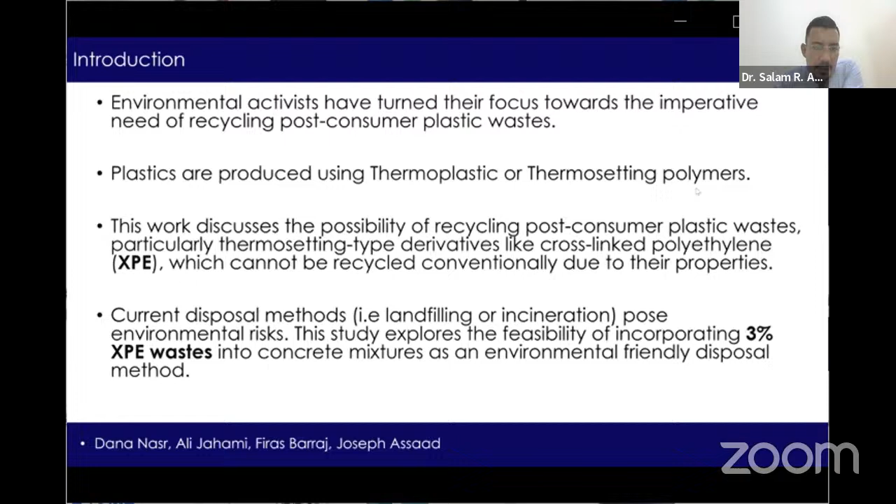Previous research studies showed that adding XPE to concrete can weaken the concrete's mechanical properties due to their relatively reduced density, weak characteristic strength when compared to natural aggregates, and poor adhesion bond with the cement paste. Three main alternatives are assessed in this work to restore the concrete mechanical and structural properties after the incorporation of 3% XPE plastic waste: one, reducing the water-to-cement ratio from 0.55 to 0.46; two, the addition of 1% steel fiber; and three, an addition of 15% styrene butadiene rubber (SBR) latex as a mixing water replacement.

Reinforced concrete beams without stirrups are tested for shear strength to study the possibility of using XPE in concrete construction, which represents an efficient disposal method of XPE plastic waste without harming the land and marine environment.

Let's talk now about the experimental program. Mainly, let's start with the materials.

ASTM C150 Type 1 Portland cement is used as a primary binding material along with natural siliceous sand and crushed limestone coarse aggregates, a high-range water reducer (HRWR) based on naphthalene sulfonate to improve workability, steel microfilament fibers having 13mm length and 0.18mm diameter, a commercially available SBR commonly used as a bonding agent, and XPE material obtained by shredding high-voltage electric cable plastic waste into pieces measuring 2 to 12 millimeters in size, as shown in the picture in this slide.

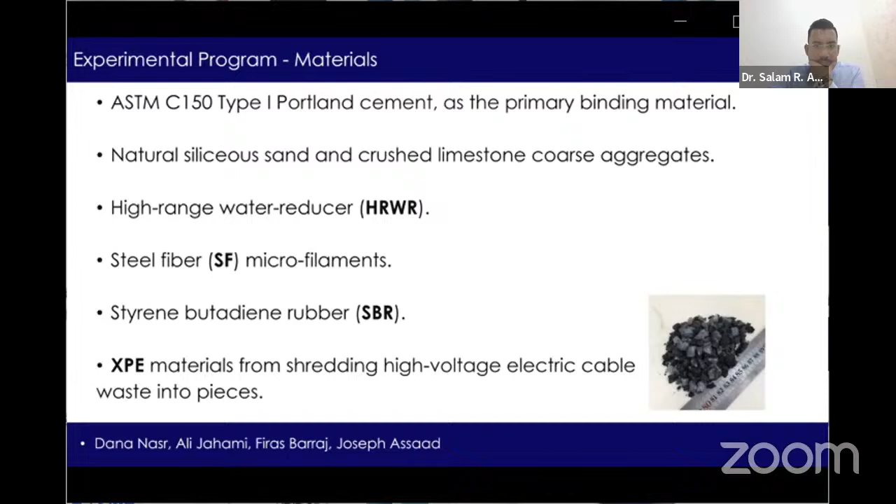Moving now to the mix proportions, 5 concrete mixtures are tested in this work. The first is the control mix with no XPE, containing 325 kg per cubic meter of cement, a water-to-cement ratio of 0.55, and a fine-to-total aggregate ratio of 0.45.

The second mix incorporates XPE shreds at 3% by total concrete volume, with fine and coarse aggregates adjusted accordingly to maintain a fixed aggregate ratio of 0.45. The third mix uses 3% XPE plastic waste with reduced water-to-cement ratio from 0.55 to 0.46.

The fourth mix contains 3% XPE and 1% steel fiber by volume. The final mix consists of 3% XPE and 15% SBR as a mixing water replacement.

Let's talk now about the testing methods. Our purpose was to determine the hardened density, compressive strength, splitting tensile strength, modulus of elasticity, flexural strength, and shear strength.

The molds used for testing reinforced concrete shear strength have the following measures: 150 by 150 millimeter square cross-section and 780 millimeter length.

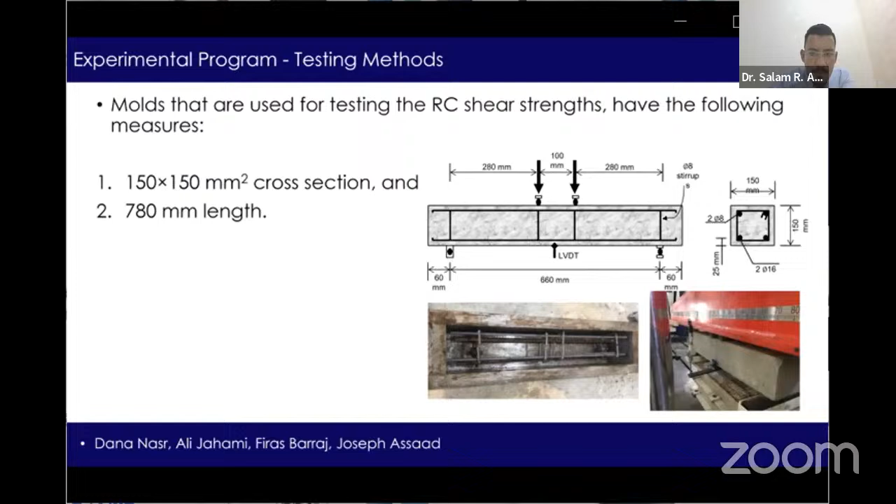Let's talk now about the test results and discussions, starting with plain concrete properties. The HRWR demand used to achieve a fixed slump of 200 plus or minus 15 millimeters, the hardened density, and mechanical properties like F'c, Ft, Fr, and modulus of elasticity of tested mixtures are summarized in the shown table.

It is clear that the HRWR dosage slightly decreased from 2.65% for the control mix to 2.5% with XPE addition, and this value remarkably increased to 3.7% when the water-to-cement ratio was reduced from 0.55 to 0.46. This can be related to reduced mixing water and increased internal friction within the aggregate skeleton.

The density of the hardened concrete decreased from 2,315 kg per cubic meter for the control mix to 2,225 kg per cubic meter with 3% XPE addition. The drop in mechanical properties due to XPE additions is very clear in this table, but this drop was recovered when the water-to-cement ratio was reduced from 0.55 to 0.46.

For example, if we look at mix 3 containing 3% XPE and reduced water-to-cement ratio to 0.46, we notice that F'c reached 30.8 megapascal and Fr reached 5.6 megapascal. So we can conclude that reducing water-to-cement ratio is an appropriate alternative to refine the matrix porosity and ensure strength development.

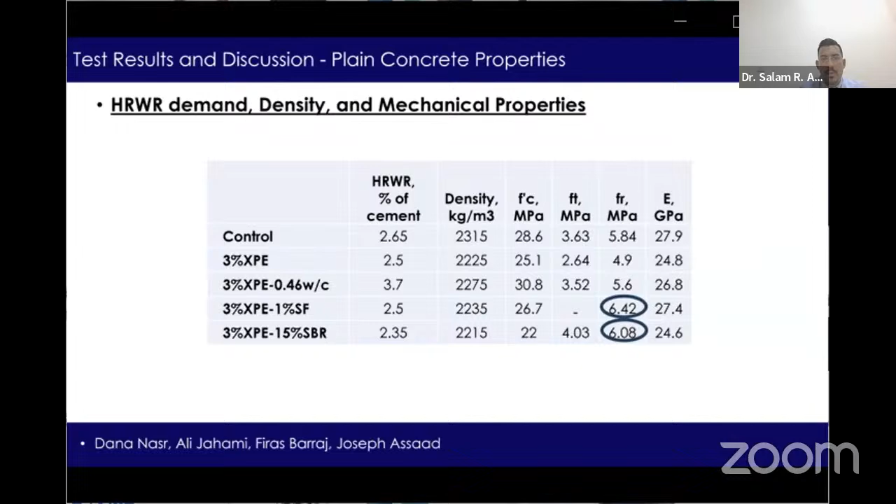Alternatively, when steel fiber and SBR were incorporated, only the tensile-related properties were recovered. For example, Fr reached 6.42 megapascal when 1% steel fiber was added, and Fr reached 6.08 megapascal when 15% SBR was used. For fibers, this can be due to a bridging effect that delays crack formation and propagation during tensile loading, leading to improved flexural properties. For SBR, these polymeric latices are efficient in improving adhesive bonding within the aggregate skeleton.

It is very clear that the mechanical properties dropped with XPE additions due to their weak strength and lightweight characteristics compared to natural aggregates. This drop in mechanical properties due to XPE additions was recovered, as previously seen, when the water-to-cement ratio dropped from 0.55 to 0.46. And for the last two mixes, as previously mentioned, the values of Fr were recovered with the incorporation of steel fiber and SBR.

Let's move now to the shear strength of reinforced concrete beams. As shown in the figure presented in this slide, all reinforced concrete beams displayed similar load versus midspan deflection curves.

We can see that the control beam failed at a Pmax, or ultimate load, of 57.94 kilonewton and a deflection delta max of 2.77 millimeter, as shown in the table on the next slide.

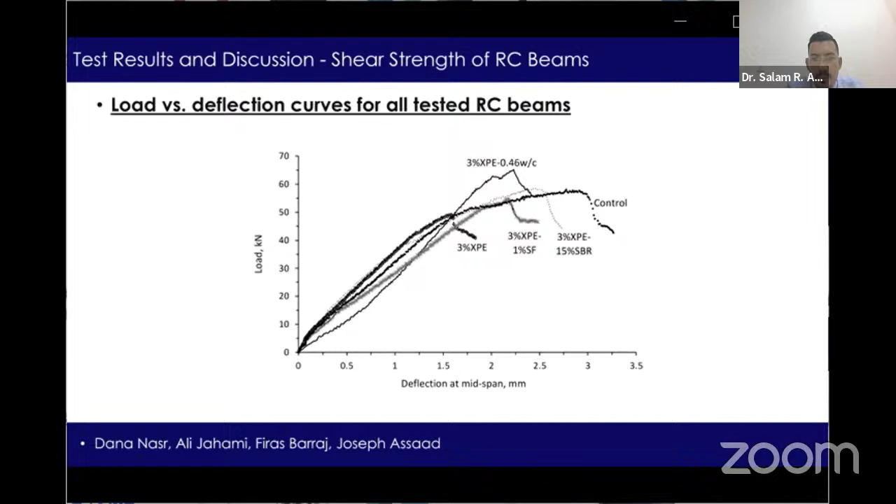In addition to Pmax, representing the maximum load capacity, and delta max, representing the corresponding maximum deflection, the table summarizes values for V crack, which represents the first diagonal cracking load, and PDC, the post-diagonal cracking index, used to quantify the maximum beam resistance after the formation of the first diagonal crack.

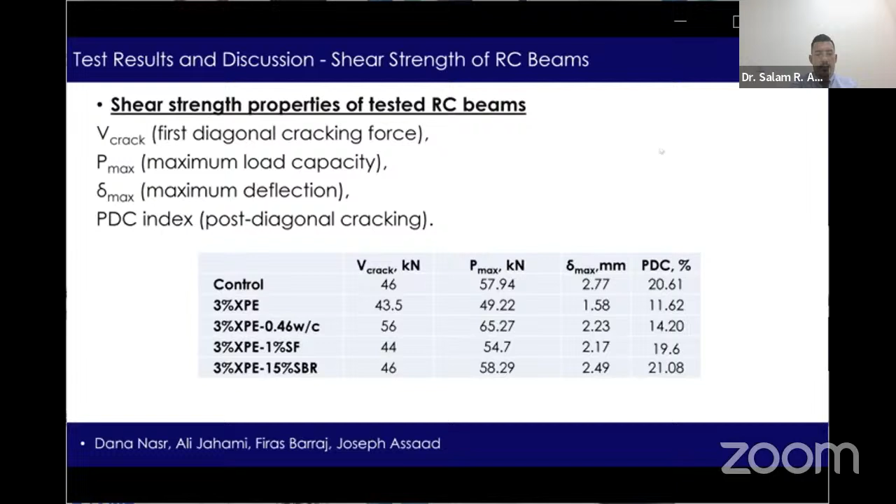So let's discuss these results together.

From the previous figure representing the load versus midspan deflection plot, we can conclude that the performance of reinforced concrete beams with the addition of 3% XPE was fully restored, or even surpassed the performance of the control beam, when the water to cement ratio was reduced from 0.55 to 0.46.

The corresponding values for the mix including 3% XPE and 0.46 water to cement ratio are: 56 kilonewton for V crack, 65.27 kilonewton for Pmax, and 2.23 millimeter for delta max.

Thus, the disposal of 3% XPE plastic waste in concrete production can be achieved without negative effects on the structural properties, given that the mixing water is adjusted to restore the concrete strength.

Alternatively, the steel fiber or SBR alternatives also proved efficient to restore the reinforced concrete beam's performance, but these remain slightly less performant than the water to cement ratio reduction alternative.

For example, when 1% steel fiber was used in the concrete mix, the shear strength properties reached: V crack 44 kilonewton, Pmax 54.7 kilonewton, delta max 2.17 millimeters, and PDC index 19.6%.

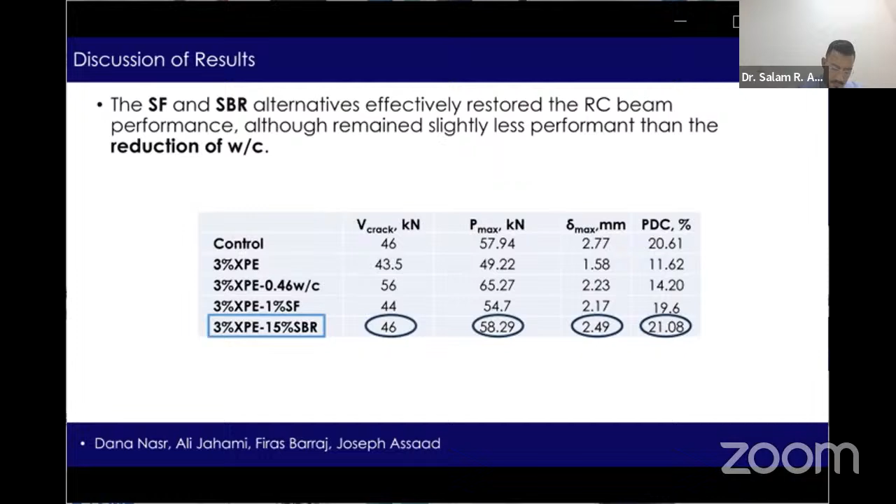For concrete containing steel fibers, the improvement in performance can be due to the bridging effect that reduces the initiation of cracks during loading and promotes higher aggregate interlock along the cracks.

Alternatively, for concrete containing SBR, the improved performance can be due to the presence of polymers that enhance bonding along the XPE particles and cement matrix surfaces. Additionally, the use of SBR improved the bond to embedded steel bars, densifying the interfaces along the longitudinal reinforcement.

Finally, it was shown that the post-diagonal cracking index remarkably increased. It became pretty close to the control mix when steel fiber was used, and it even surpassed the value of PDC corresponding to the control mix when SBR was used in the mix.

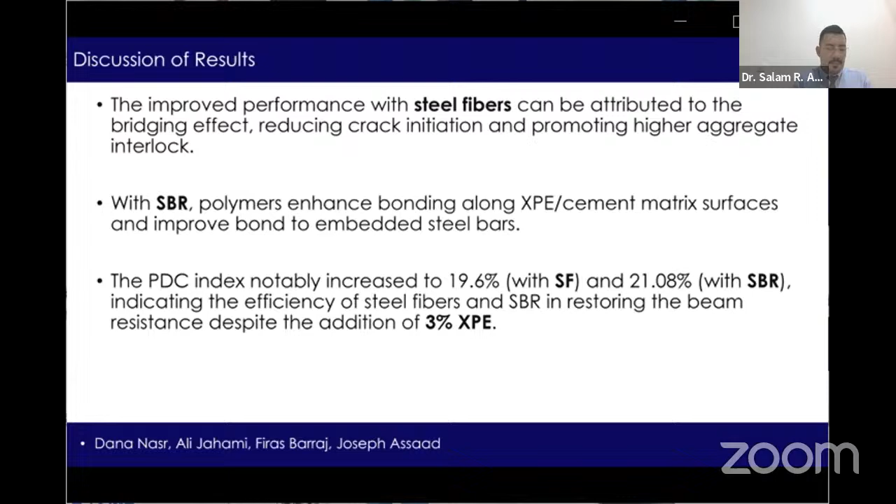So we can say that these results indicate the efficiency of steel fibers and SBR in restoring the beam resistance after the formation of the first diagonal crack, despite the addition of 3% XPE plastic waste.

Let's conclude this presentation with the following concluding remarks. This study is part of a comprehensive research work undertaken to assess the feasibility of incorporating XPE plastic waste in concrete mixtures as an environmentally friendly way of plastic waste disposal.

The primary objective of this study is to explore different alternatives to restore the concrete mechanical and structural properties after the incorporation of XPE additives. Test results showed that the addition of 3% XPE by volume to the concrete mixture caused a drop in compression and tensile responses due to their weak strength and lightweight characteristics compared to natural aggregates.

One main alternative proposed in this work is the reduction of the water to cement ratio from 0.55 to 0.46, while adjusting the workability with additional superplasticizers. This alternative was found efficient to refine the matrix porosity and enhance the plain and structural properties of concrete containing XPE plastic wastes.

Other two alternatives were also proposed in the study, based on incorporating steel fibers and SBR respectively. The tensile-related properties were recovered with the addition of steel fiber and SBR due to improved bridging and bonding that can delay the formation and propagation of cracks. The shear strength of reinforced concrete beams containing XPE waste improved with the addition of steel fiber and SBR due to the enhanced aggregate interlock mechanism along the diagonal fractured surfaces.

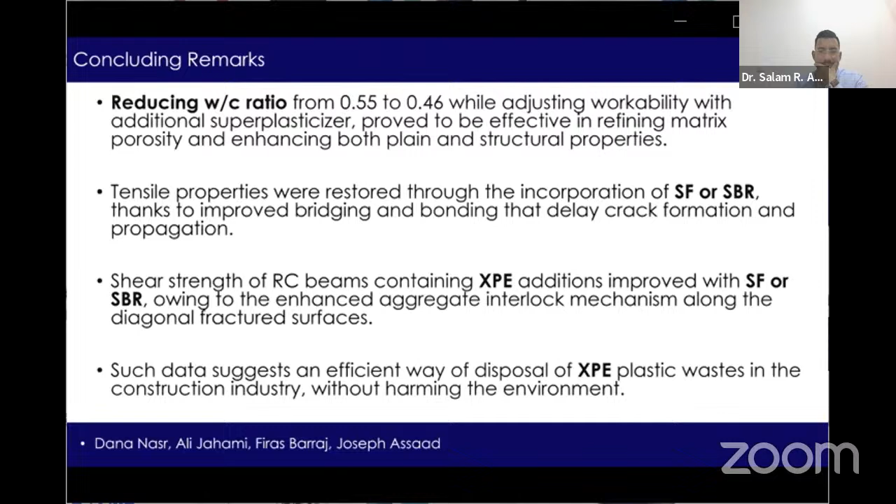As a final conclusion remark, we can state that such data suggest an efficient way of disposal of XPE plastic waste in the construction industry without harming the land and the marine environment. Thank you.

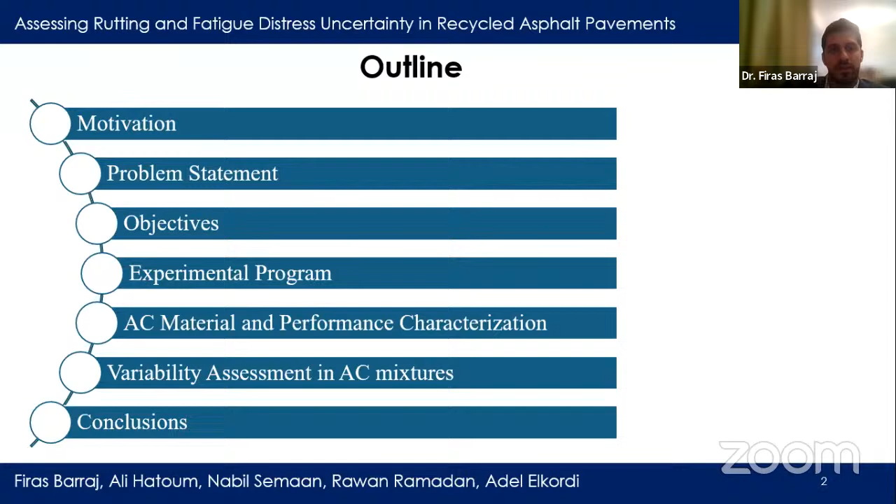Here are the main highlights of the presentation. I will talk about the motivation behind this work, the problem statement, the objective targeted, the experimental program to characterize asphalt concrete material and field performance, the methodology used to assess the variability in asphalt mixes performance, ending with some concluding remarks.

Starting with the motivation: while the cost of raw material is always increasing and strict environmental regulations are imposed, pursuing sustainable development in the asphalt industry has become a necessity. One effective way to achieve this right now is by using reclaimed asphalt pavement, RAP material, promoting recyclability to produce new asphalt mixtures.

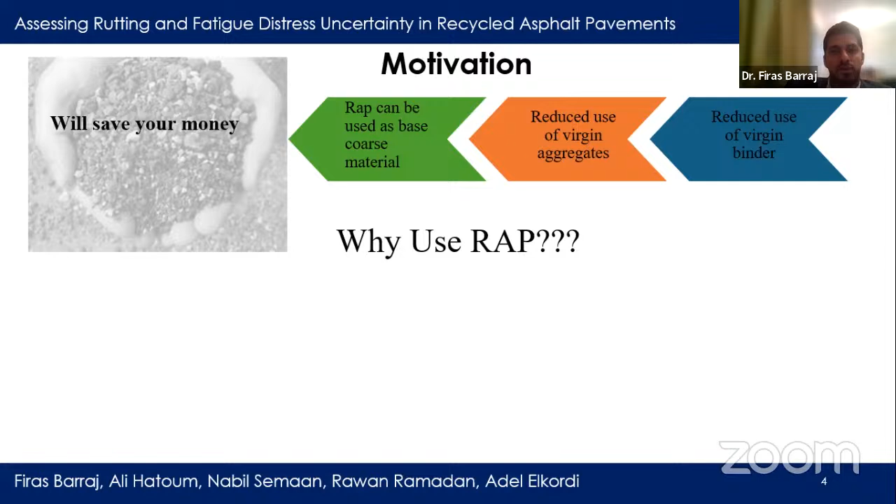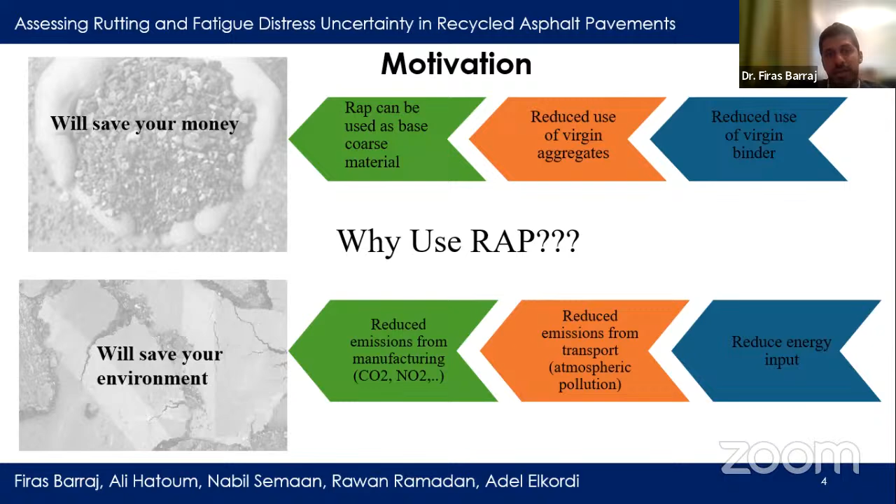So why RAP? Firstly, RAP, consisting of old pavement material, is valuable as a suitable substitute for raw material. RAP utilization diminishes the necessity of virgin binders and virgin aggregate, and can also be used as base course or landfill material. This can save a lot of money. RAP usage also reduces the energy and emission inputs required to refine and manufacture bitumen and to extract and transport aggregates from quarry to plant stockpile. This will also save the environment.

Now with the problem statement: will RAP utilization lead to bad performance? This statement is legitimate since performance doubt exists because of the aged binder of RAP, typically characterized by a high softening point and low degree of ductility, both of which may lead to obtaining a brittle asphalt mixture more susceptible to accelerated damage.

Secondly, there is concern about the variability in RAP raw material, especially in the case of unclassified RAP and uncontrolled plant processing. In this case, variabilities in the asphalt content and gradation can lead to inconsistent properties and performance of the mixture, and difficulties to meet the volumetric requirement for contractors.

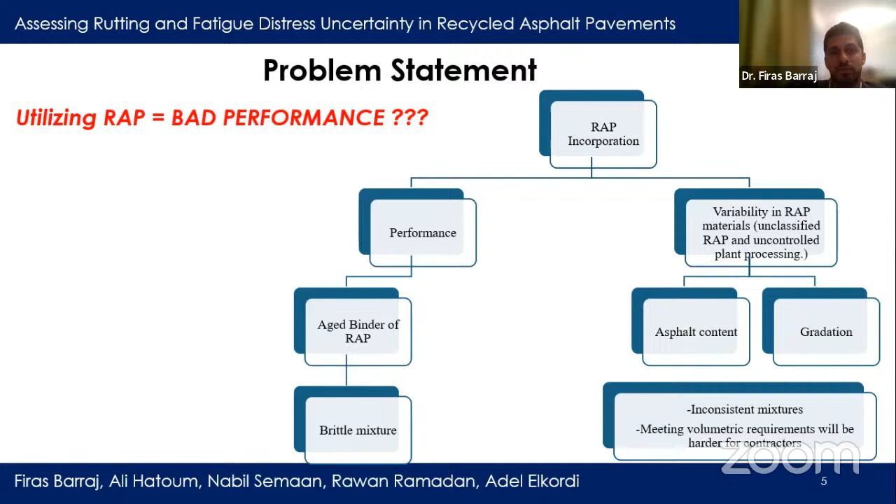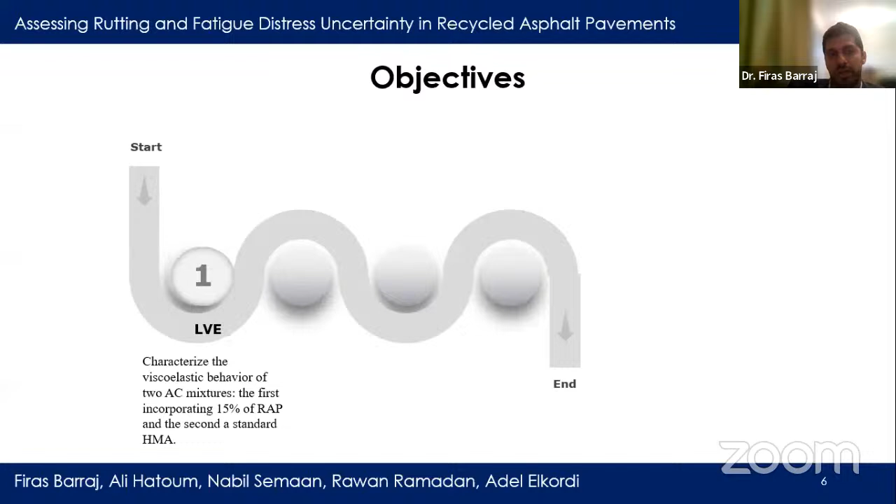The objectives are to characterize the viscoelastic behavior of two asphalt concrete mixtures, the first incorporating 15% of RAP and the second a standard or control hot mix asphalt (HMA). Secondly, to assess the permanent deformation (rutting) and fatigue potential of the two mixtures. Thirdly, to probabilistically model the parameters of the sigmoidal function of the dynamic modulus for the two mixtures, and use this variability to quantify uncertainty in performance prediction of standard HMA and RAP mixtures.

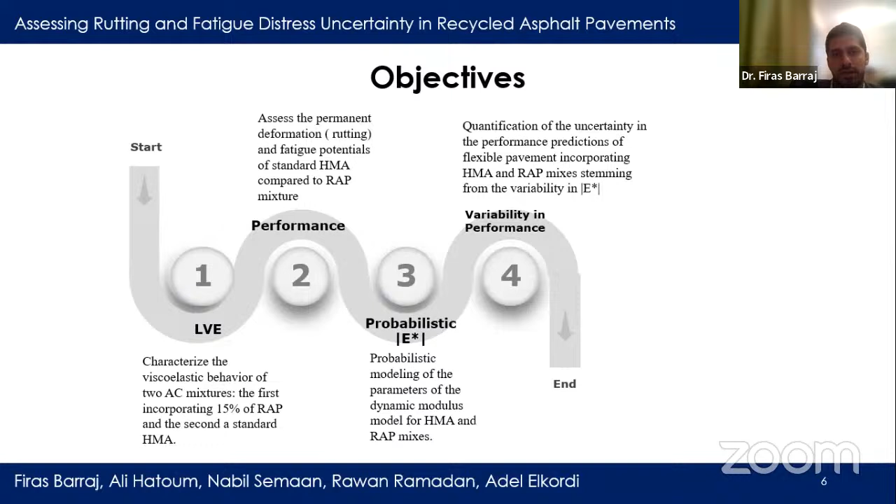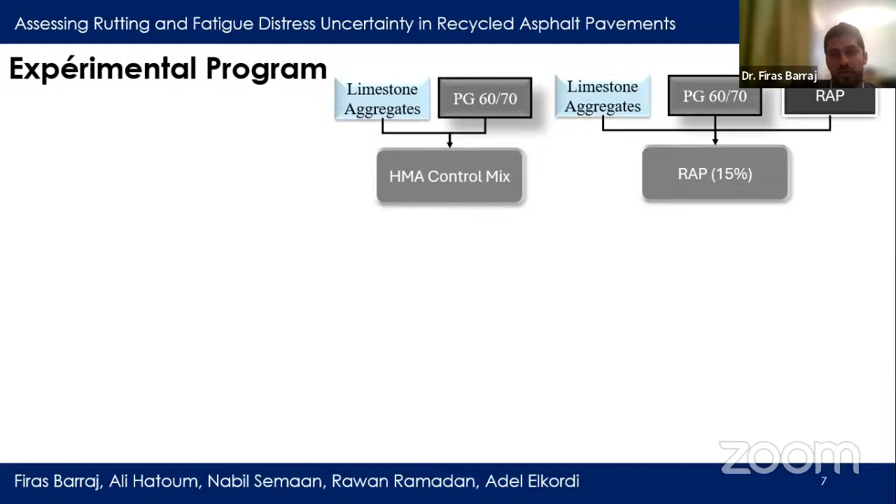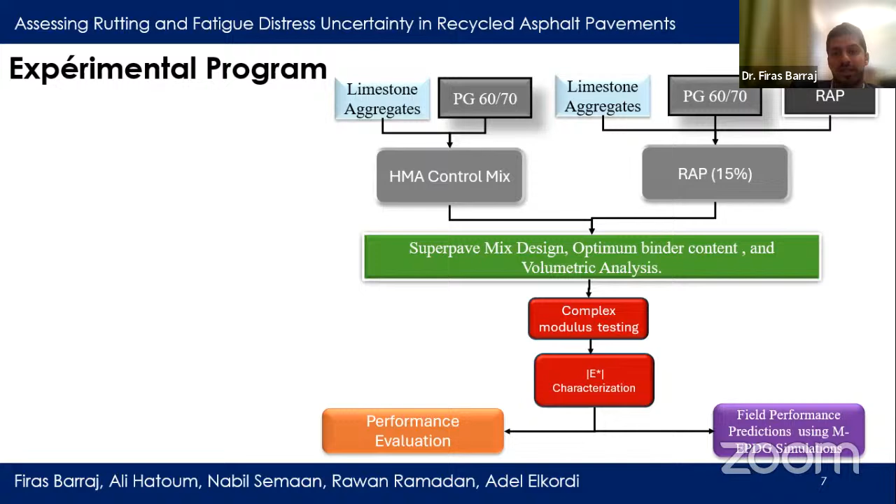In the experimental program, two different asphalt concrete mixes were prepared: a control mix representing standard HMA, and a RAP mixture incorporating 15% RAP. The mix design was performed according to the Superpave design method with adherence to its volumetric criteria. Complex modulus testing was conducted to characterize the viscoelastic properties and performance of the asphalt concrete mixes, and finally the field performance of pavement structures incorporating the analyzed AC mixes was assessed using MEPDG simulation.

So what is complex modulus testing? It consists of applying a uniaxial compressive sinusoidal stress to an asphalt concrete sample and determining the response strain in order to compute the dynamic modulus and phase angle. The test is conducted at different temperature and frequency combinations to cover the full behavior of the material. The measured values are then used to develop dynamic modulus master curves using the time-temperature superposition principle.

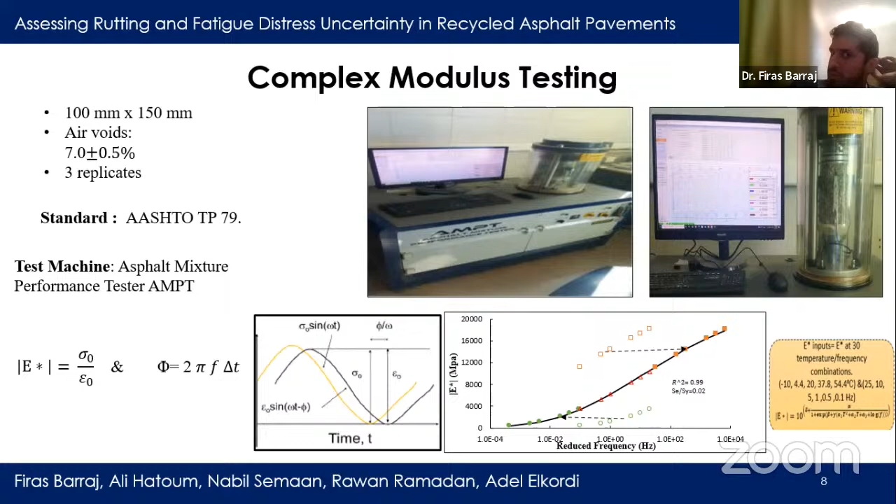The results of the linear viscoelastic characterization obtained from complex modulus testing showed that, compared to HMA, the dynamic modulus of RAP mix decreased over the full range of frequency, with a maximum reduction of 21%, 11%, and 4% in the lower, middle, and higher frequency ranges respectively. From a performance perspective, at intermediate and higher frequencies, the smaller E-star values of RAP mixtures indicated an improvement in fatigue and thermal cracking resistance compared to standard HMA. But the inferior modulus in the lower frequency range, or at higher temperature, marks a reduction in rutting resistance.

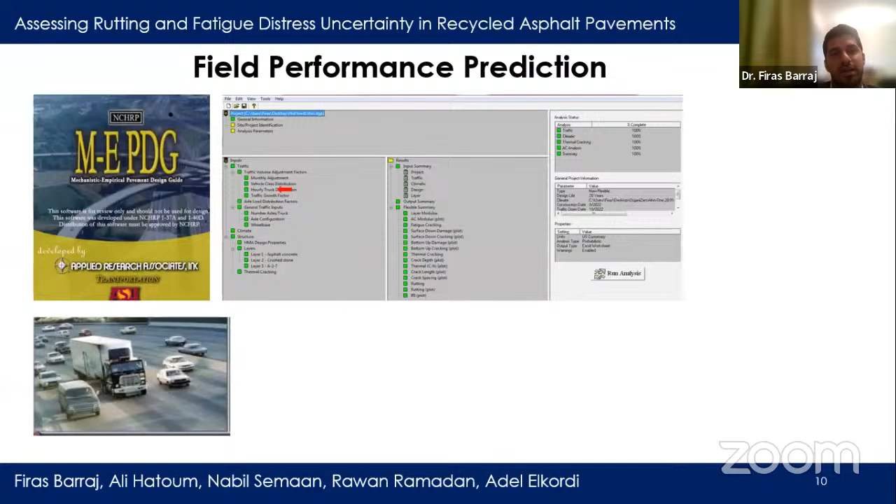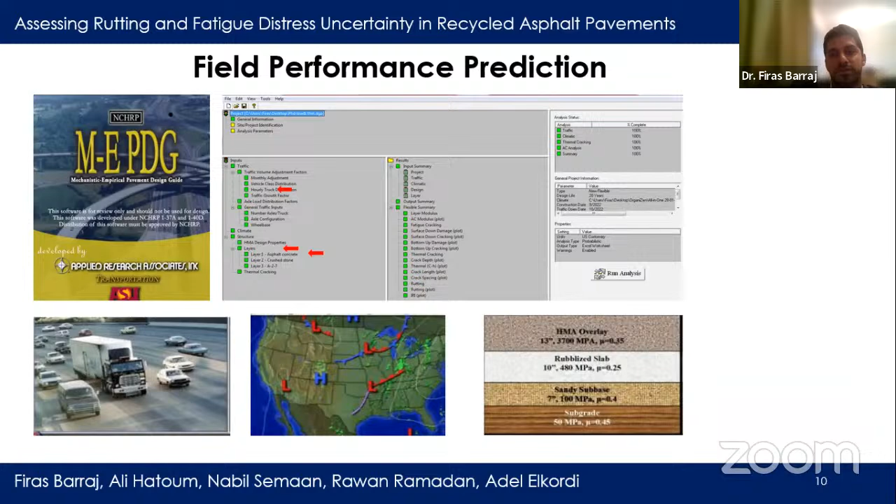Further, the field performance of a flexible pavement structure using the analyzed AC mixes was assessed by the Mechanistic Empirical Pavement Design Guide simulation, MEPDG, an international software currently adopted by the majority of pavement design firms. Initially, the software requires three sets of input: the traffic, climate, and structure inputs. In this research, I considered the Lebanese case for evaluation. Here you can see the main inputs to run an MEPDG simulation: in traffic, we have general and axle loading inputs; we also have the climatic file; and finally the part regarding the materials of the pavement structure, where the dynamic modulus values are inserted to characterize the asphalt mix used.

The results of the permanent deformation, or rutting, predictions after 10 years indicate that the rutting resistance of RAP mixes was reduced by 3.5%. These results agree with the findings of E-star testing that revealed softer modulus at higher temperature for mixes incorporating RAP. On the other hand, bottom-up cracking results revealed an improvement in cracking performance of RAP mixes by 9.4% compared to standard HMA, which also aligns with the E-star testing findings showing stiffer, more brittle modulus for the standard HMA.

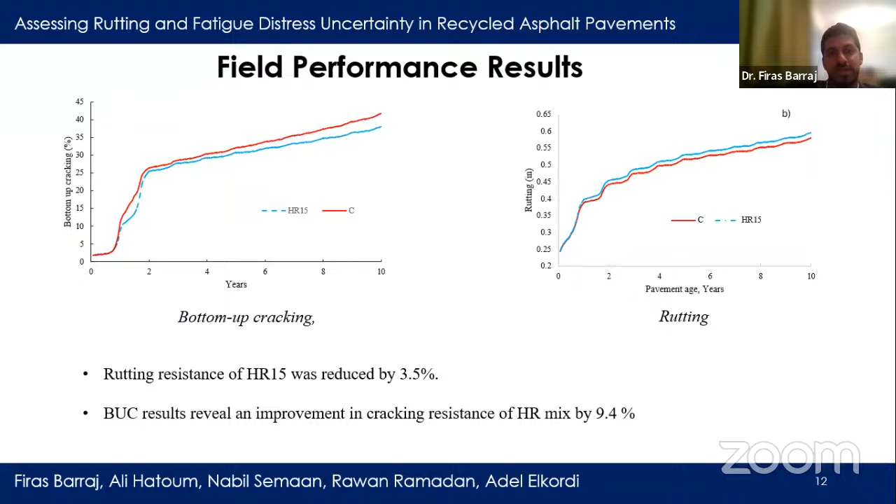The probabilistic model for these constants was developed to generate and compute 500 simulated values of the dynamic modulus E-star for each type of mix. In other words, for each of the 500 sets of constants, we obtain 500 simulated values of E-star for the control and RAP mixes. These 500 modulus values were then used in MEPDG simulation to quantify the uncertainty in field pavement performance.

As a result, for the bottom-up cracking, the results indicate that the coefficient of variation between simulations of the 500 RAP mixes decreased linearly with time, from 7.2% after 2.5 years to 5.28% after 10 years. Conversely, the coefficient of variation of the control mixes appears to increase linearly over time, rising from 1.83% after 2.5 years to 2.3% in 10 years.

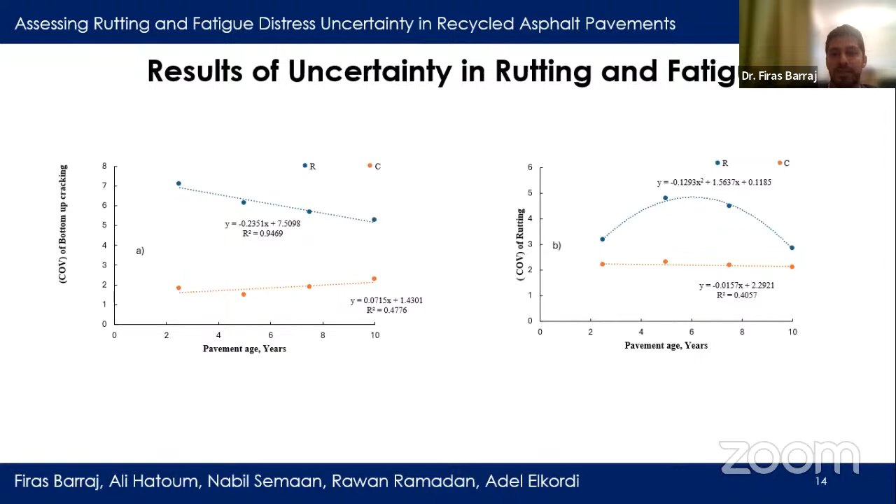Now, for the control mixtures, the coefficient of variation value in the HMA mixtures seems to be consistent with time and decrease linearly, albeit very slightly, from 2.2% in 2.5 years to 2.1% in 10 years. Overall, both the coefficient of variation value of bottom-up cracking and rutting showed comparable results, supporting the convenience of using unclassified RAP material in new asphalt mixes.

And finally, the conclusions. Conclusion number 1: in comparison with standard HMA, incorporating 15% of RAP reduced the dynamic modulus over the full range of frequency, with a maximum reduction of 21%, 11%, and 4% in the lower, middle, and higher frequency ranges, respectively.

Secondly, based on MEPDG predictions, comparable rutting performance can be expected from conventional HMA and RAP mixes with low content of RAP, with a percentage change in the range of 4%. Also, bottom-up cracking results reveal an improvement in cracking resistance of RAP mixes by 9.4% compared to standard HMA.

Thirdly, the uncertainty in the cracking performance of RAP mixture consistently and slightly exceeds that of the control mixes across the pavement design life, as expected due to variation in the material of unclassified RAP. And finally, the coefficient of variation value in the fatigue prediction of RAP and HMA mixtures showed comparable results, supporting the convenience of using unclassified RAP material in a new asphalt mixture.

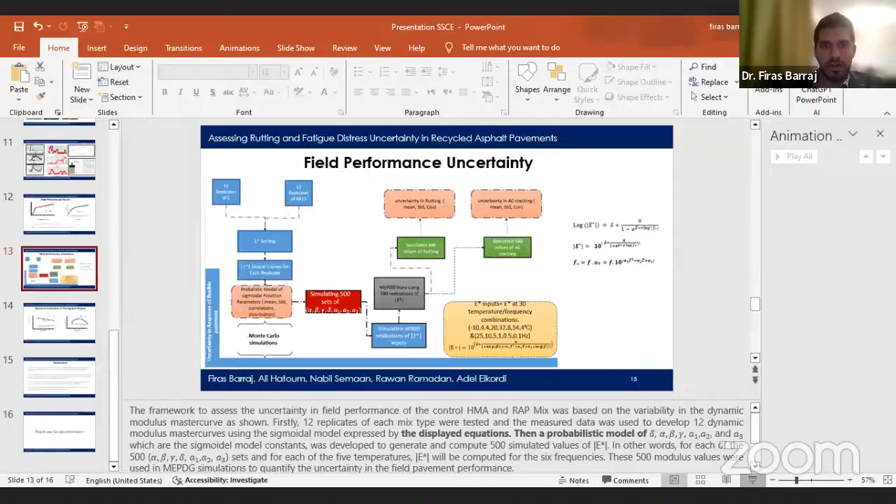So you can see here, I used 12 replicates for each of the mixes, for the control and the RAP mixes. From that, I generated a probabilistic model for the parameters of the sigmoidal model, which by Monte Carlo will generate 500 sets of these coefficients. And I can implement these parameters to calculate, using this equation, the new 500 E-star values for the control as well as for the RAP mixes. So I used 12 replicates, which is statistically proven, because to derive statistical models from experimental data, you need between 10 to 15 replicates.

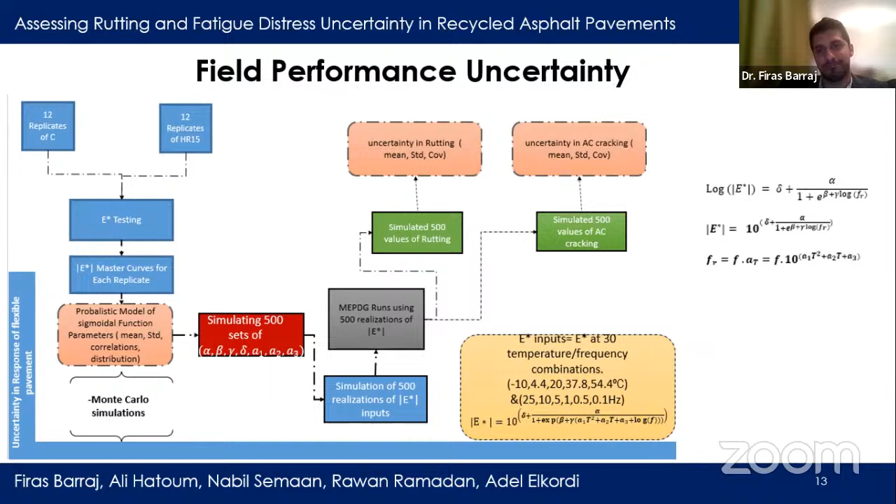Okay, thank you so much. Just only I wanted to see that. Okay, thank you. Thank you again for your welcome. Thank you very much, Dr. Firas Barraj. I think we have more questions.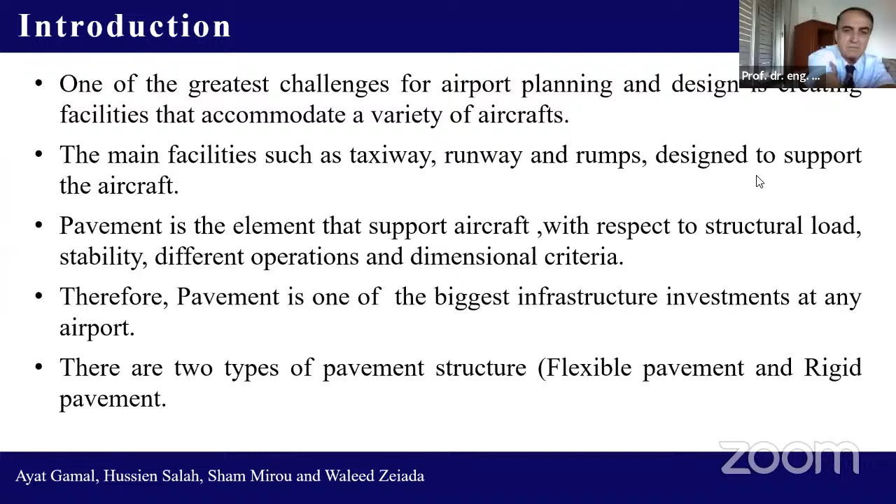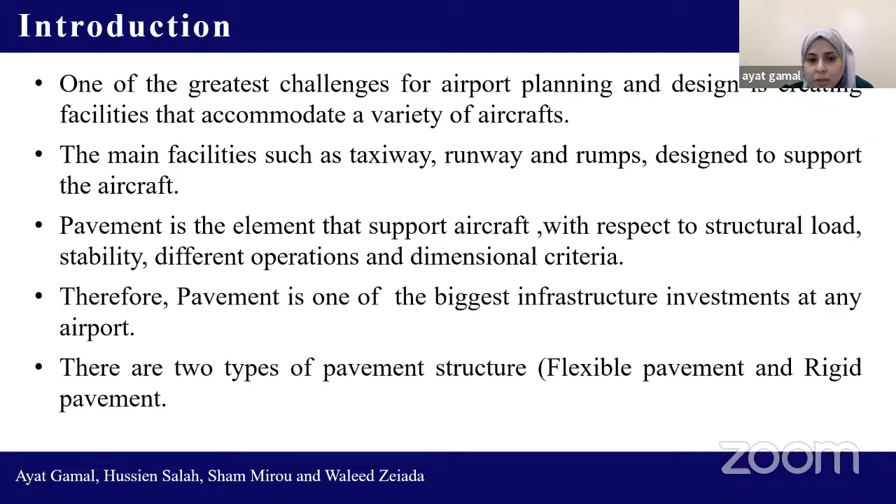Starting with introduction, one of the greatest challenges of airport planning and design is designing airport facilities that accommodate a variety of aircraft. The main facilities such as taxiway, runway, and ramps are designed to support aircraft. Pavement is the element that supports aircraft with respect to structural load, stability, different operations, and dimensional criteria. Therefore, pavement is one of the biggest infrastructure investments at any airport, and for pavement structure there are two types: flexible and rigid pavement.

Starting with this approach, in this paper our approach is with flexible pavement. Flexible pavement has many advantages, such as being inexpensive, less construction duration time, easy to repair, and no joints required. Pavement responses are crucial for determining pavement performance and estimating pavement service life.

Aircraft load on flexible pavement produces two critical responses: the first is the horizontal tensile strain at the bottom of the AC layer, which is the asphalt concrete layer. The other is vertical compressive stress at the top of the subgrade, which contributes to rutting.

As we can see, tensile strain at the bottom of the asphalt layer is a big contributor to fatigue cracking, and the compressive stress at the top of the subgrade contributes to rutting. Understanding fatigue and rutting is very important for pavement performance and to achieve a permanent pavement structure.

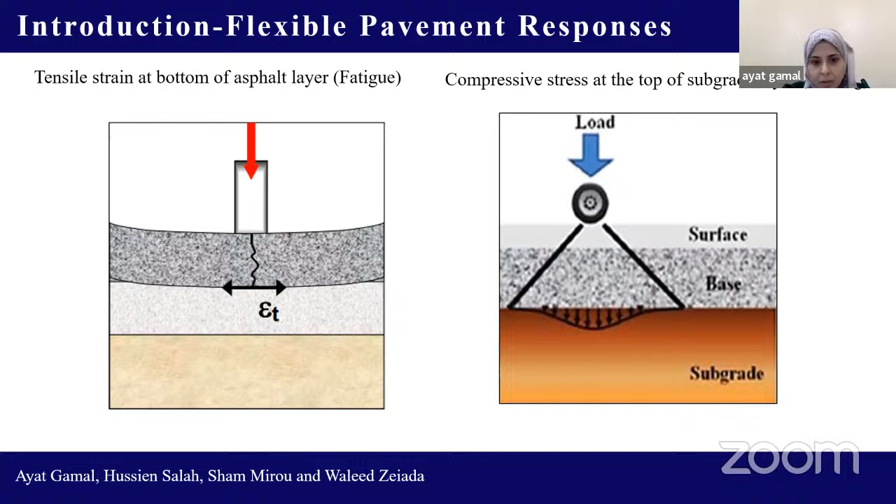Moving to literature review: there is a study from 2019 that compared two specialized finite element programs, KENSLABS and EverFE, to analyze rigid pavement. Comparing both programs showed that deflection and stresses showed good correlation using both programs.

Another study from 2017 used KENLAYER software to analyze flexible pavement, comparing different section structures, and it recommended a specific section for giving the best number of repetitions till failure for fatigue and rutting.

Another study from 2015 used WinJULEA software to analyze pavement structure for flexible pavement, comparing different wheel interactions and responses on pavement, and also comparing different wheel configurations and different speeds for aircraft takeoff.

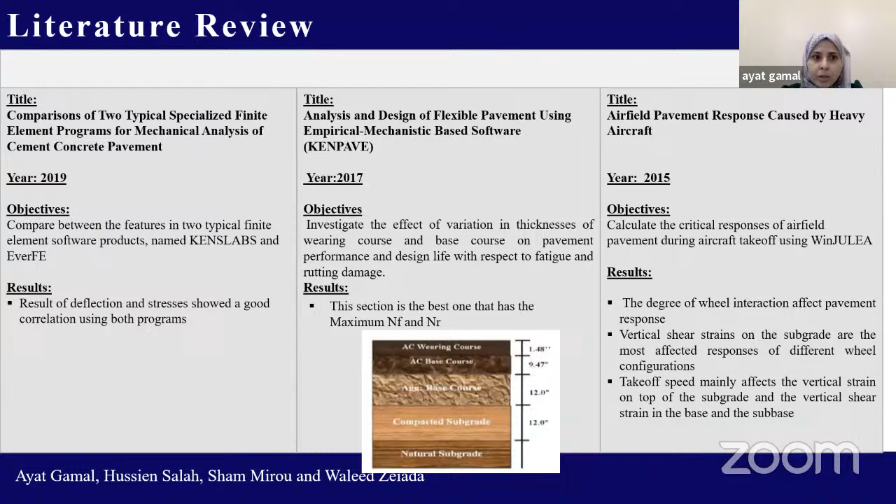So we find different studies using different software, but we don't know which software is better or recommended for airfield design. Our objective is to use different software to analyze one section of flexible pavement in airfield design. We suggest using JULEA and KENPAVE, which is KENLAYER, to compare between them and to compute responses for flexible pavement.

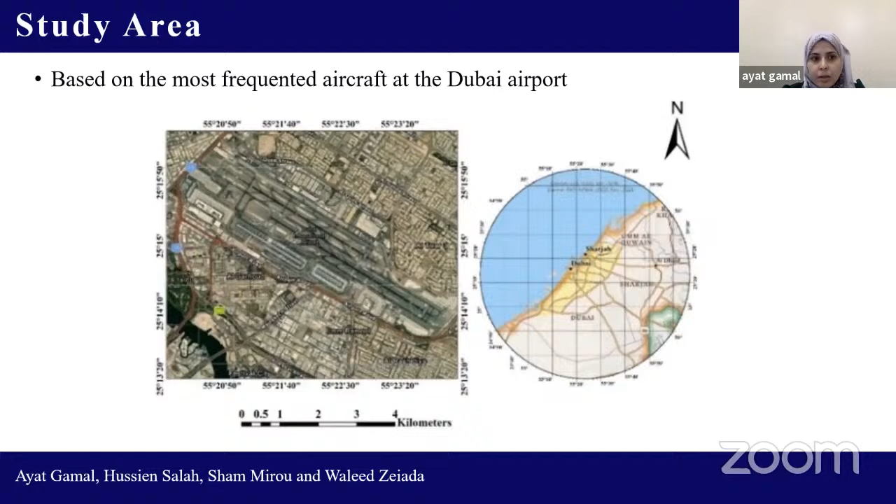Our study area will be Dubai Airport. We will choose which aircraft for design based on the most frequented aircrafts in Dubai Airport.

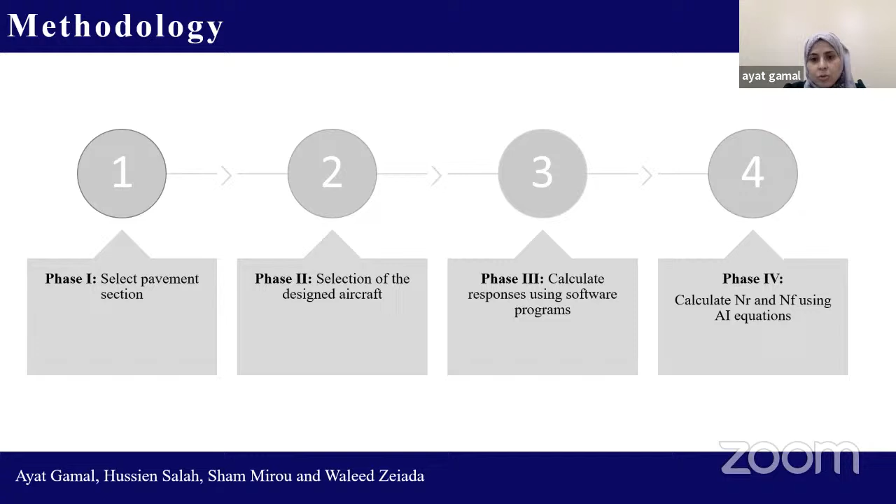Our methodology will follow 4 steps, starting with selection of pavement section. Second is to select the design aircraft. Third is to calculate responses using 2 software programs, WinJULEA and KENLAYER. And the last is to calculate number of repetitions till failure for fatigue and rutting using the Asphalt Institute equation, using the responses from the different software used.

Phase 2 is to select the design aircraft. Based on the most frequented aircraft in Dubai Airport, we compare between them. We choose the first 5, which are Airbus A350-900, Airbus A380, Boeing 777-300ER, Boeing 777-200ER, and Boeing 787. We compare maximum takeoff weight, tire pressure, and we calculated tire load for each tire based on axle type and wheel configuration.

And we decided to choose the Airbus A350-900 because it gives us the maximum tire load.

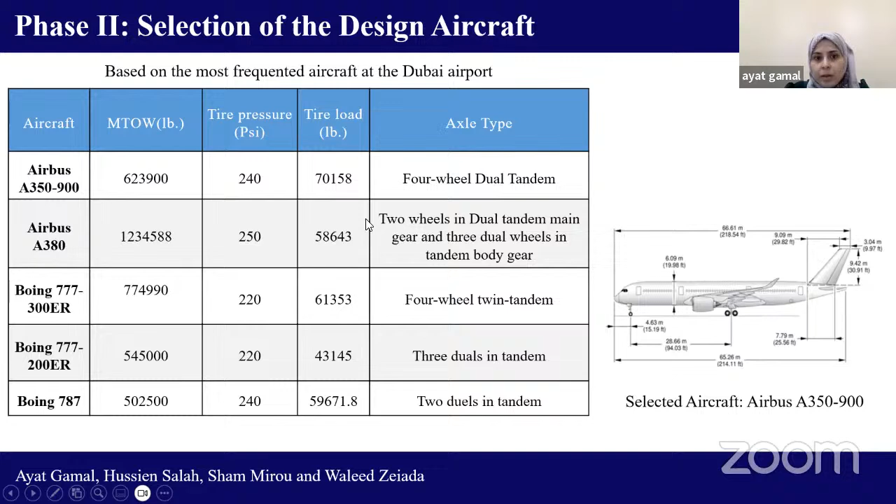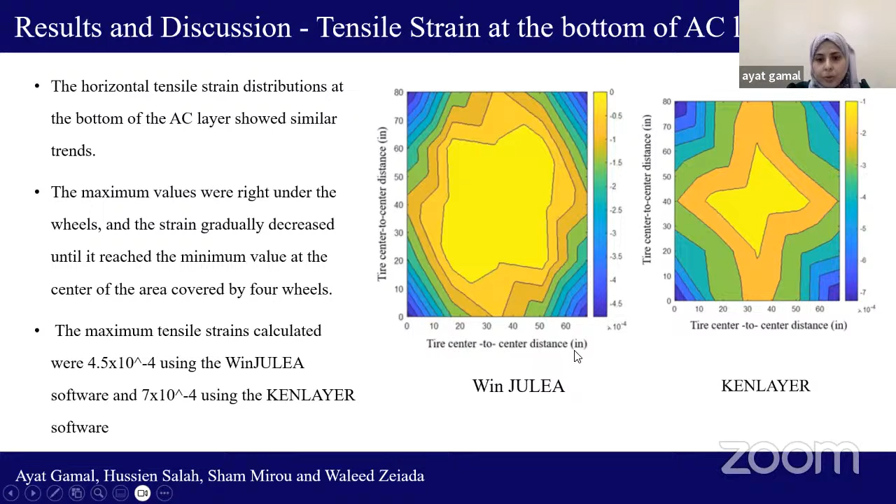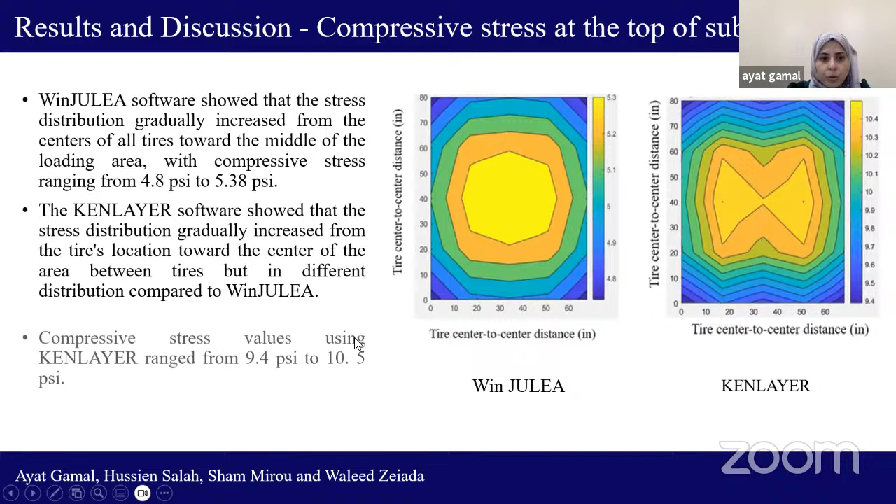For compressive stress at the top of the subgrade, it showed a different trend, but similarly at the edges. KENLAYER software also showed maximum stresses compared to WinJULEA. For calculation of number of repetitions till failure, as we can see, KENLAYER gives maybe double the value of WinJULEA software per number of repetitions till failure for fatigue and rut.

In conclusion, both software have good agreement with each other regarding stress distribution trends, but actually KENLAYER software showed maximum values of stress and strain compared to WinJULEA. This may be because WinJULEA depends on layer elastic theory, while KENLAYER is a finite element method, which may suggest that KENLAYER is more appropriate or more accurate than WinJULEA because it depends on a finite element approach.

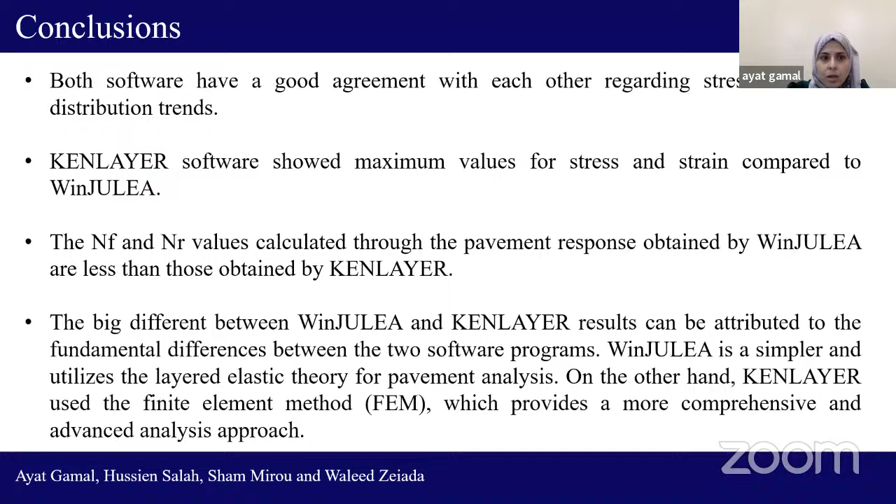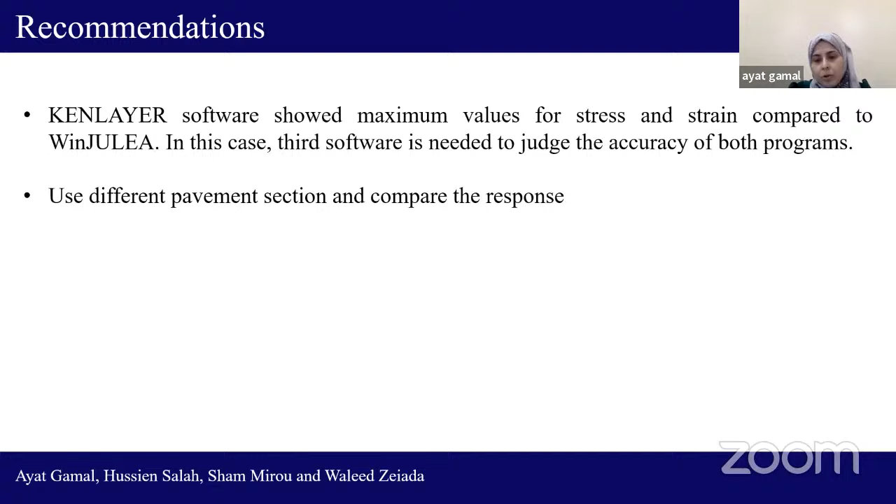Our recommendation, because of this big difference between the two software which are already used in literature, is to extend our study, or another study, to use a third software to judge between them and determine which one is accurate. The other thing is we can use a different pavement section to compare responses. Thank you.

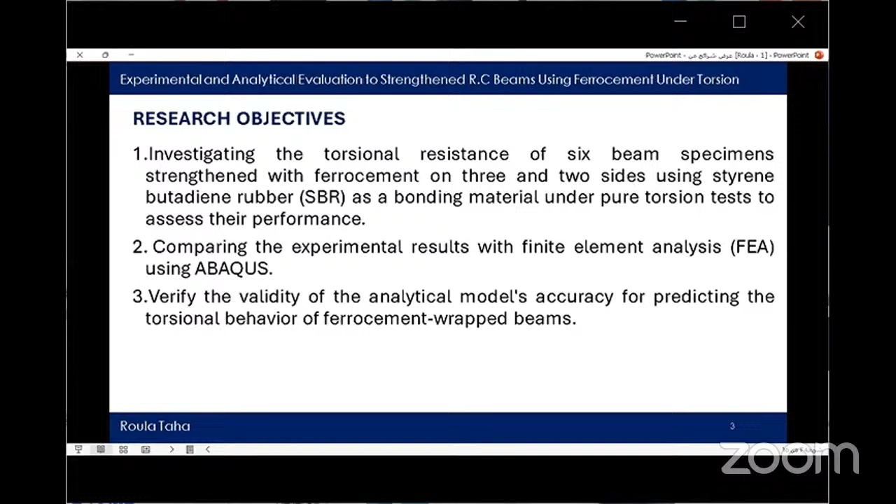This study aims to investigate the torsional resistance capacity of beams strengthened by ferrocement from 3 and 2 sides, and by utilizing SBR as a connection material when added to mortar as an emulsion. Also, to compare the experimental results with finite element analysis using Abaqus to verify the validity of the analytical model.

6 beams with cross-section 125 by 250 millimeters were cast. All beams were reinforced with 2 bars of 12 millimeter at tension and 2 bars of 12 millimeter at the compression side with yield stress 445 megapascal. Also, beams were provided with stirrups of normal mild steel, 8 millimeter diameter and 100 millimeter spacing, with yield stress 408 megapascal.

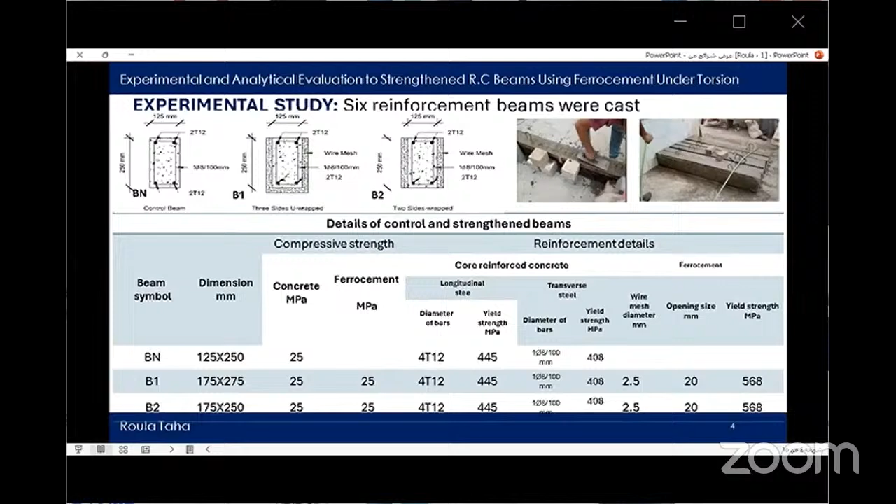To achieve the required mechanical properties, many tests were conducted. The tested beams were divided into groups, each with 2 beams. BN group was considered the control beam, while B1 group was wrapped from 3 sides, and B2 group was wrapped from 2 sides.

The details of control and strengthening beams are shown in this table, where the wire mesh diameter for ferrocement is 2.5 millimeter, the opening size is 20 millimeter, and the yield strength is 568 megapascal.

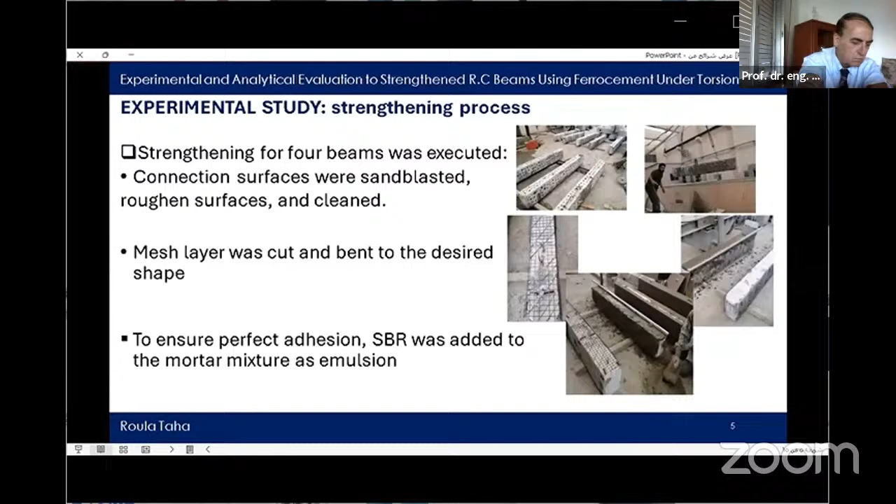To implement the ferrocement strengthening system, the beams were sandblasted on their surfaces, then cleaned using compressed air and water. The necessary length of mesh layer was cut and bent to the required shape. Our mortar mixture was designed as an integral adhesion to achieve the desired connection by adding SBR as an emulsion with 20% of the cement weight.

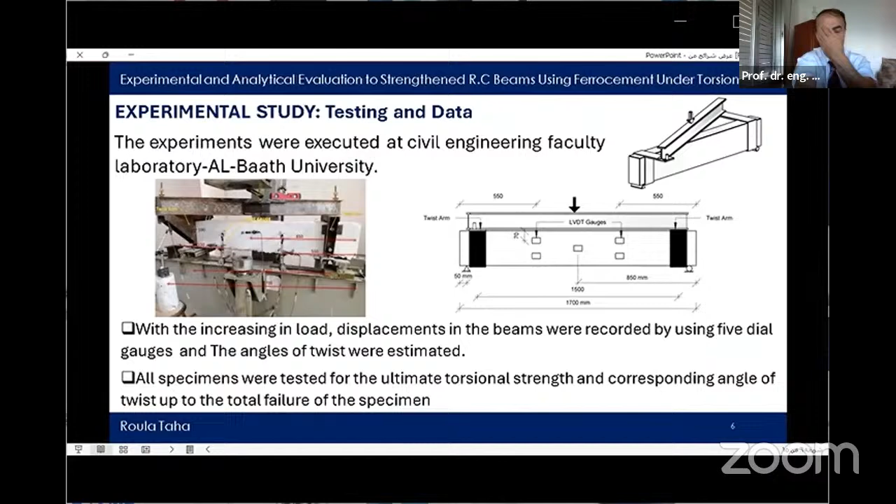All tested beams were subjected to twist from both ends using two opposite twist arms. 5 sensors were installed to record displacement as the load increased, then the angle of twist was calculated. All beams were tested to determine their cracking torque, ultimate torsional strength, and angle of twist at first crack and at failure point.

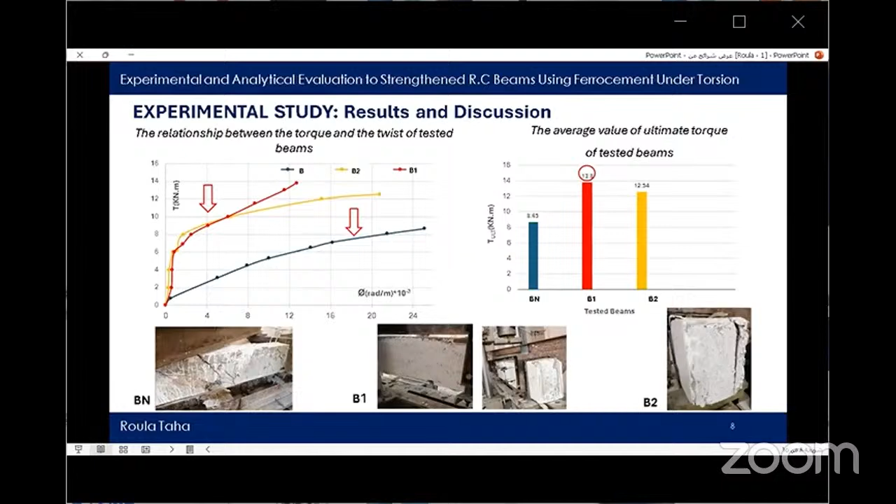It is clear that the torsion behavior of the strengthened beams and cracking control ability have improved, and the growth of cracks is reduced. 3-side wrapping maintained its connection with the RC beams with only minor cracking, while the ferrocement laminate with 2-side wrapping showed partial slipping with semi-deep cracking.

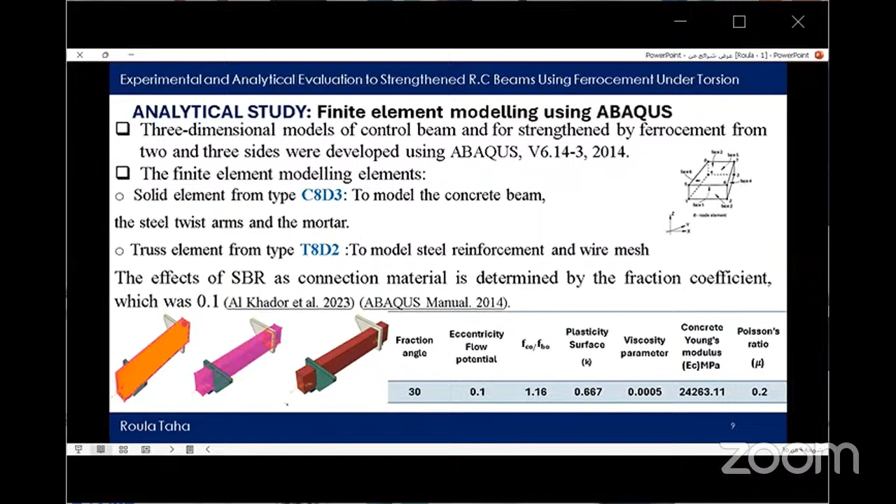For the analytical study, 3-dimensional models of control and strengthened beams by ferrocement from 3 and 2 sides were modeled using Abaqus version 6.14. We used the element C3D8, defined by 8 nodes having 3 degrees of freedom at each node, to model the concrete beam, steel twist arms, and mortar. We used element T3D2, defined by 2 nodes with 3 degrees of freedom at each node, to model reinforcement and wire mesh.

The effect of SBR as connection material is determined by friction coefficient, which was used as 0.1. All the material properties matched those utilized in the experiments.

From the figures, we can notice that the failure pattern of the analytical model for the control beam was similar to the experimental results. Also, the formation and growing of the cracks are very similar.

In the same manner, we can see that the failure mode of the experimental and analytical curve of B1 beam is close. Also, the cracks observed at the midspan of the beam in both cases, despite a slight decrease in the experimental twist angle. The torsional behavior of both experimental and analytical tests of B2 group is comparable.

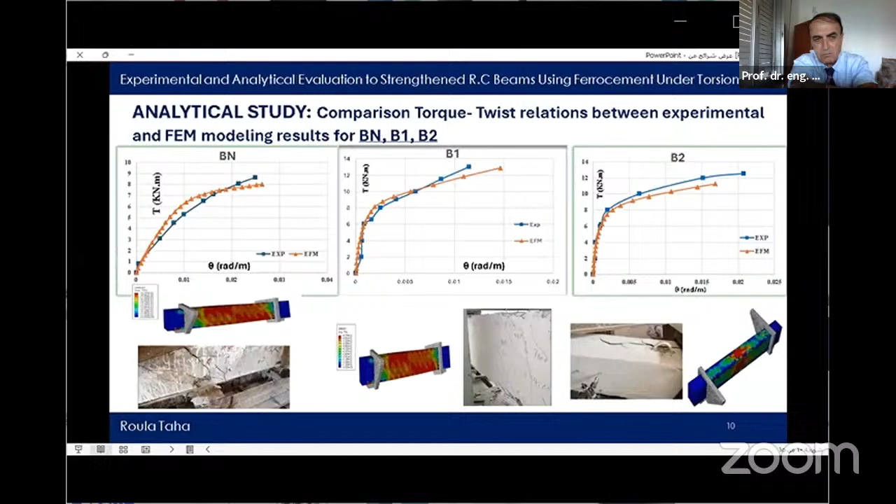The analytical curve slightly diverges from the experimental one. The results of the analytical and experimental tests are presented in this table, where we can see the matching results.

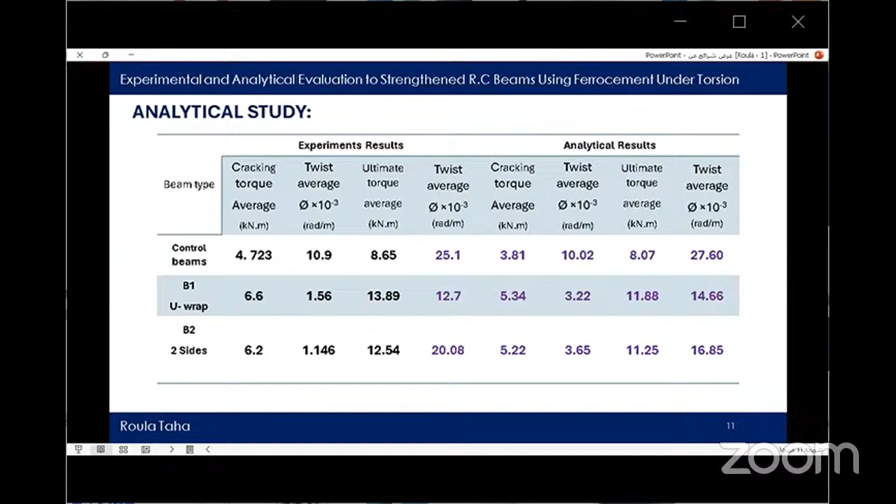From the above mentioned, the following conclusions are drawn. Strengthening beams with ferrocement satisfactorily improves torsion behavior regardless of the wrapping type. Experimental results showed that strengthening from 3 sides enhanced torsional behavior by 15% more than strengthening from 2 sides. The utilization of SBR enhanced adhesion between the RC beams and ferrocement, whether applied from 3 sides or 2 sides, and maintained the connection without complete collapse.

The failure mechanism of control and strengthening beams is accurately modeled using finite element analysis by Abaqus, and the predicted torsion behavior is very close to that measured during experimental testing. While the beam wrapped on two sides led to a slight increase in stability, the U-shaped wrapping enhanced stability by notably reducing both crack formation and ultimate twist.

The references. Thank you for your listening.

Thank you, Engineer Roula. Are you available? Yes, I am here, Professor. Thank you. I'll open the floor for questions now, please. If you allow me, Dr. Muayyad, Professor George Warde, yes, please, Dr. Ali, well done. Professor Warde, please, after you. Yes, please. Professor Warde, you are muted. Sorry.

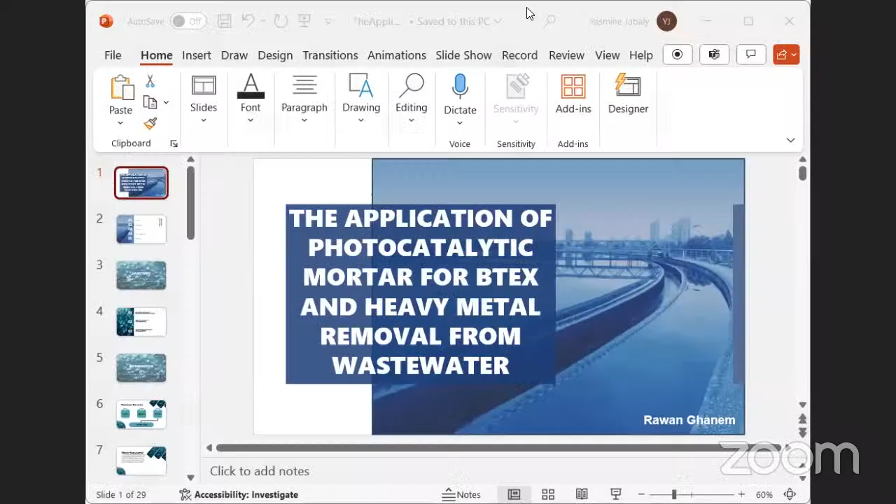Hello, everyone. Thank you, Dr. Jabaly, and thank you all for this opportunity. It's a pleasure to be presenting in this conference. Can you see my screen? Yes, it's seen, it's shared.

Thank you. In fact, yes, concrete can help treat wastewater. How? This is the scope of our research entitled 'The Application of Photocatalytic Mortar for BTEX and Heavy Metal Removal from Wastewater.' Kindly next. So the objective of this research is to test the impact of the photocatalyst on the mechanical properties of our concrete, and the impact of this catalyst on BTEX degradation and heavy metal absorption. Next, please.

Wastewater treatment has been vital, and extensive research has been done on the topic. Generally, it can be categorized into physical, biological, and chemical treatment. The scope of our research covers photocatalysis, which is a branch of chemical treatment.

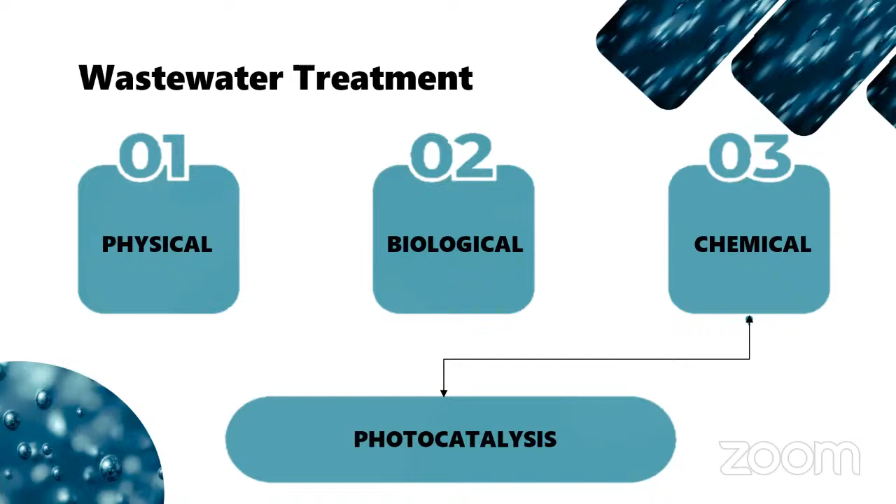What is photocatalysis? It is a mechanism that relies on the presence of a semiconductor or photocatalyst. In our case, it is titanium dioxide, that is excited by UV photon energy, producing hydroxyl radicals that are responsible for the degradation of organic pollutants.

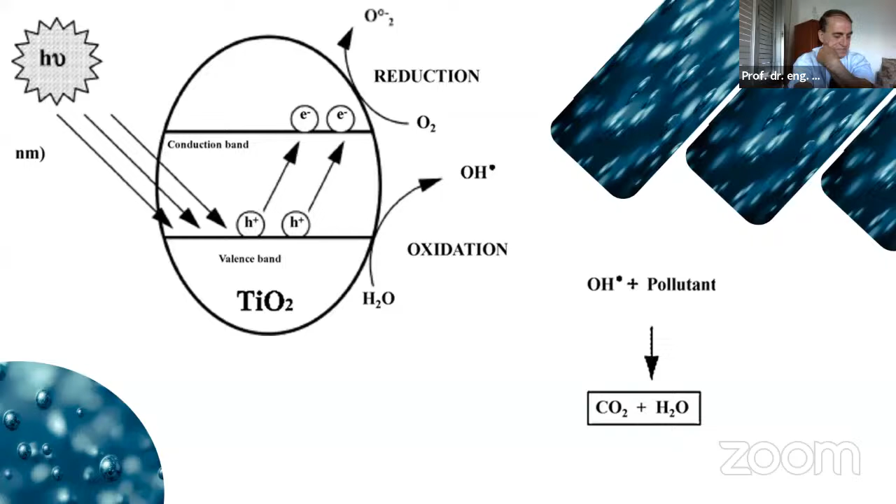When the electrons are excited, the hole left in the valence band reacts with hydroxide ions to produce hydroxyl radicals. These hydroxyl radicals react in turn with the organic pollutants and degrade them into carbon dioxide and water.

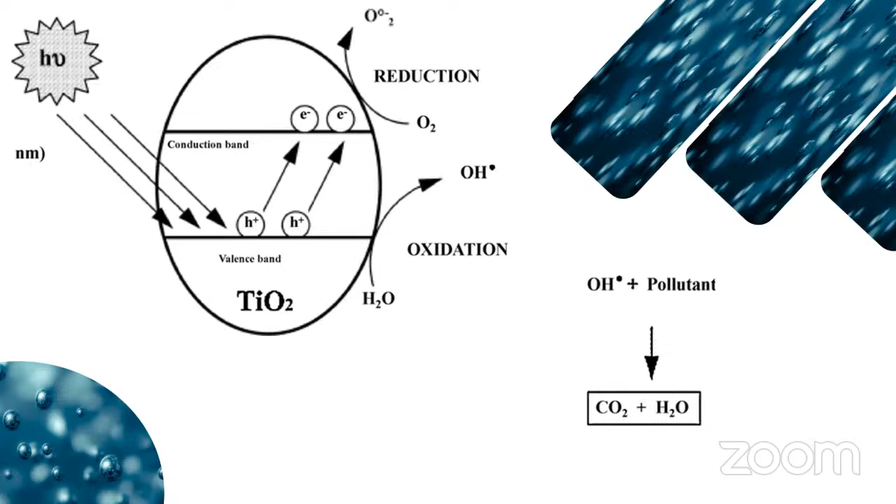In this research, we focused mainly on the removal of BTX and heavy metal contaminants found in water. Several studies were done on conventional techniques, but limited research studied BTX removal from water, which is what our results will cover.

Heavy metals are a great concern in wastewater, and they are non-biodegradable. They do not react the same way in photocatalysis as BTX, which are organic and get degraded, while heavy metals are mostly or sometimes photo-reduced. Knowing the large impact on human health, the WHO has set certain limits for their presence in water.

We will be covering several heavy metals like lead, mercury, chromium, and nickel.

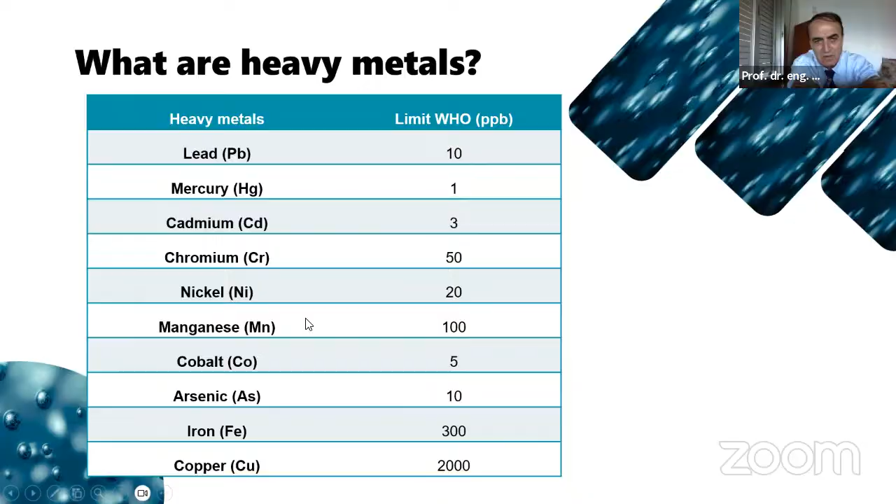Sound quality is poor. I don't know if it's recorded or if she's speaking directly. Can we move on, please? She's speaking directly, she's online. Maybe she has to fix the distance to the microphone. Rawan, if you can just fix the distance to the microphone. There's a problem in the connection, poor connection maybe. Can you do it from your side, Dr. Yasmin? Is it better this way? Can you hear clearly? Okay, thank you.

So we have decided to integrate titanium dioxide inside of the concrete mix. We prepared a control mix that contains 0% titanium dioxide.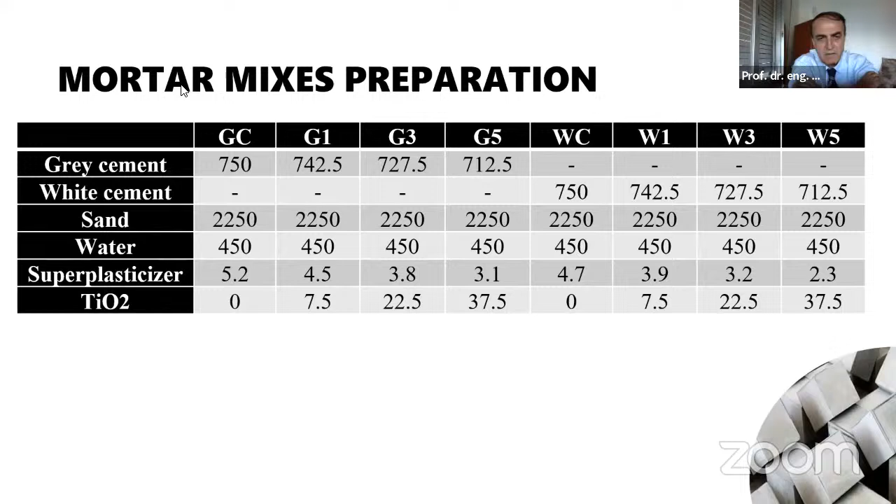Can you confirm if my voice is getting clearer? Now it's clear, yes, it's better Rawan. Okay, proceed please. Thank you.

As I hope you heard, the part where I was mentioning the percentages of titanium dioxide: we used 1%, 3%, and 5% by mass of cement materials in our mortar mix to obtain a medium strength concrete with a water to cement ratio of around 0.6.

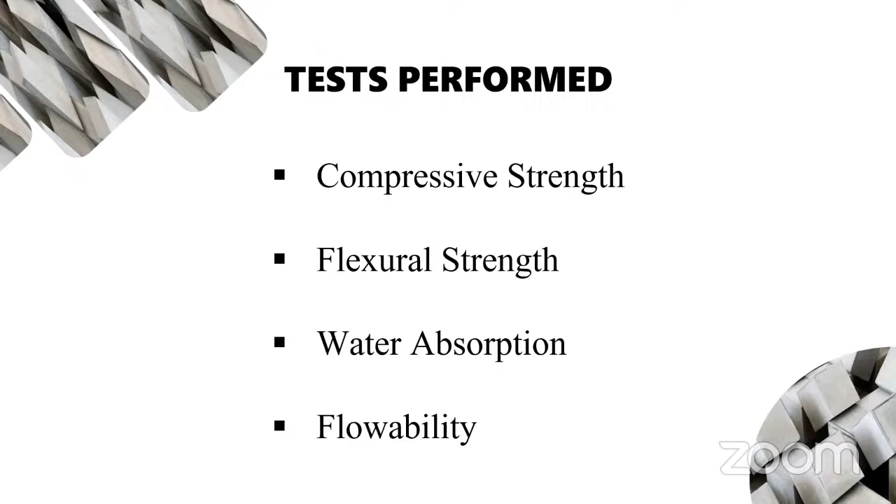These are the tests performed on concrete. We performed the flowability test and tried to maintain a constant flow for all of the mixes. On hardened concrete, we performed compressive strength, flexural strength, and water absorption at 28 days of casting.

At the University of Balamand, there is a photoreactor equipped with UV lamps, where we can put the beakers completely sealed to proceed with the experiment.

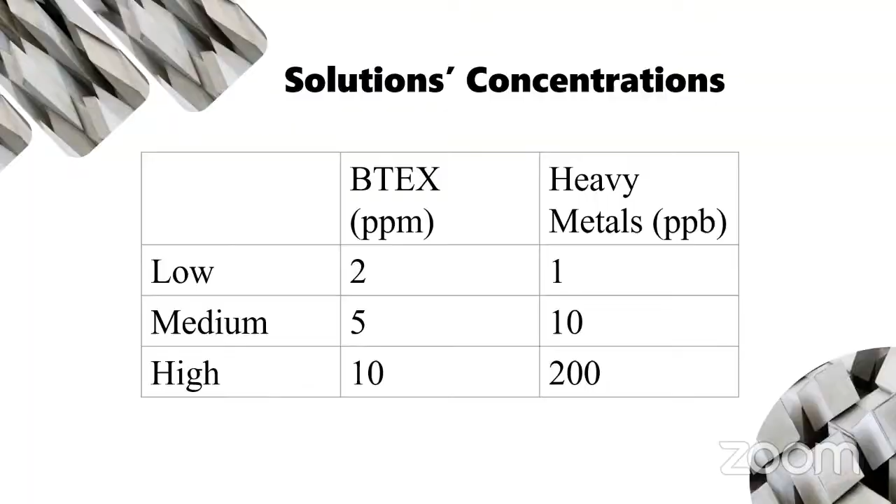After we prepared our concrete blocks, we prepared the sources of pollutants: 6 different mixes, 3 with BTEX at low, medium, and high concentrations, and 3 with heavy metals also at low, medium, and high concentrations, to understand the impact of the titanium dioxide percentages on the removal of these contaminants.

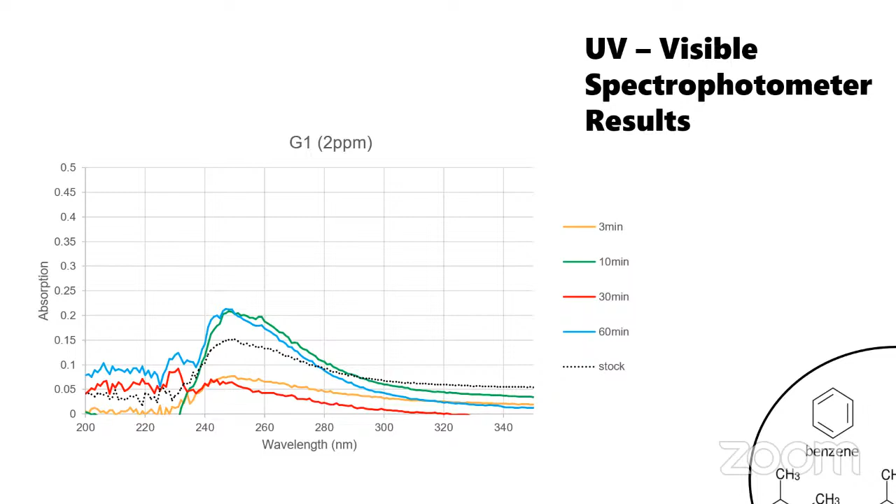As for heavy metals, samples were taken at certain time intervals and tested using ICP-MS. It was obvious that we had a decreasing trend and approximately above 95% removal of most of the heavy metals. Definitely some were not responsive to the photocatalyst, but several heavy metals were highly responsive, and we achieved the maximum drop at 120 minutes, and the mixes containing 5% titanium were the most efficient in the absorption of heavy metals.

Now we can see sometimes we have absorption-desorption, where it drops and increases, but this was only with low percentages. With high percentages of titanium, we can see full absorption of heavy metals and complete removal at 120 minutes.

Finally, we can conclude that mortar containing gray cement with 1% of titanium had the best mechanical properties and showed great results with the BTEX degradation, and mixes containing 5% titanium showed best results with the removal of heavy metals.

Now, there are some recommendations for further study. We noticed an interesting fact that the cementitious matrix itself has an impact on the removal of some contaminants, and this is to be further studied, along with understanding the reasons behind the production of byproducts which are causing an increase in the absorption of BTEX.

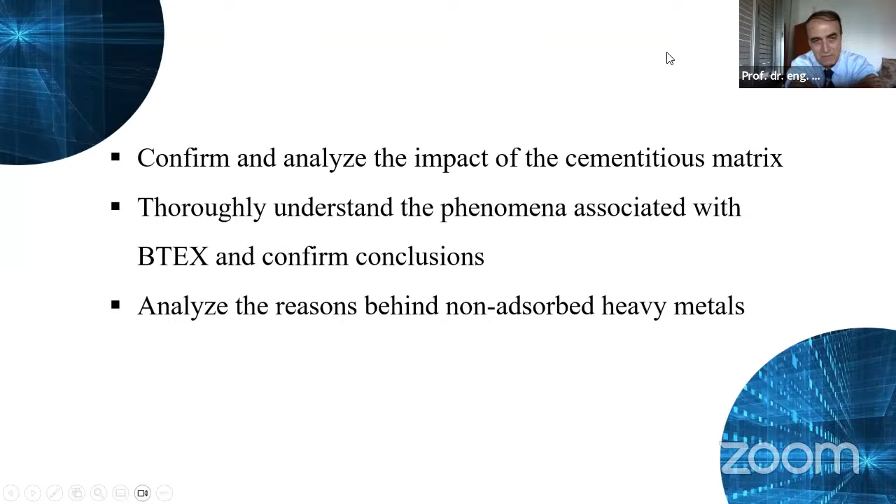Can you show me, please, the compressive strength slides? You know, this is what I want to see, the compressive strength.

And you give also the name of gray cement, I don't know, is this a new terminology or something like this? You have to say cement OPC or white cement OPC, but not gray and so on, you know. So we have to keep the constant terminology, please.

Okay, thank you. Yes, sir. Please, you got the question? Maybe the advisor. Yes, exactly.

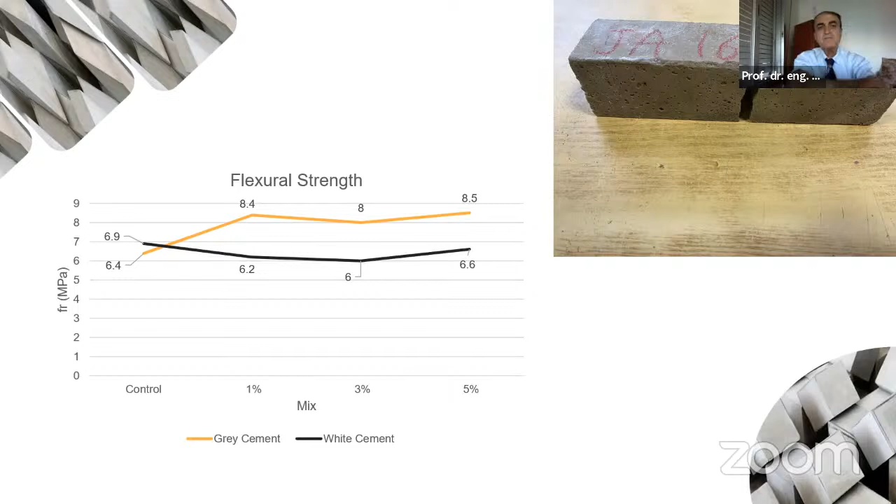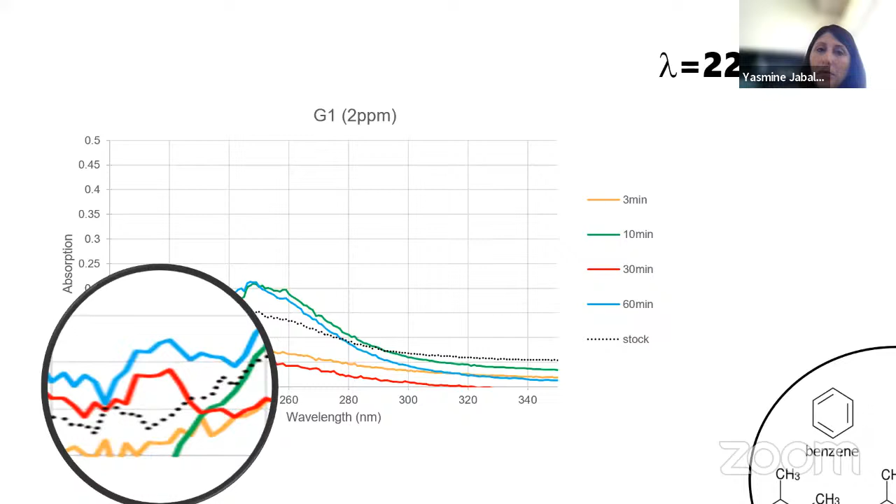Hello everyone, thank you for your presentation. Professor Yasmine, unfortunately because of the connection problems I haven't seen the error bars in the graph, especially for the evolution of the compressive strengths. Do you think, really, if you put this bar, is there an evolution, or is it just the uncertainty of measurement?

You want to see the bars for the uncertainty here and the compressive strengths? Sorry, the connection is poor, I didn't get the question clearly. If we put the error bars, do you think there is an evolution, or just the uncertainty?

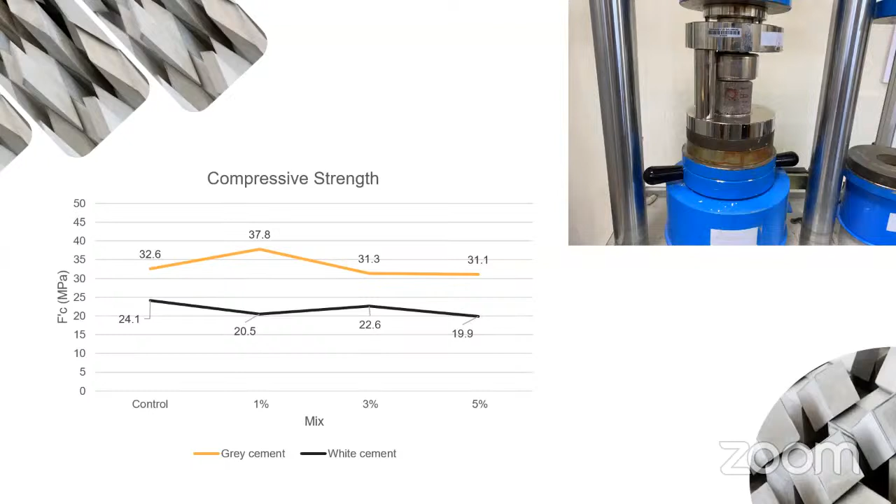No, we have already the graphs where we have the error bars, this is only to summarize the results. And no, there's no evolution, no big difference between the values shown here and the uncertainty values.

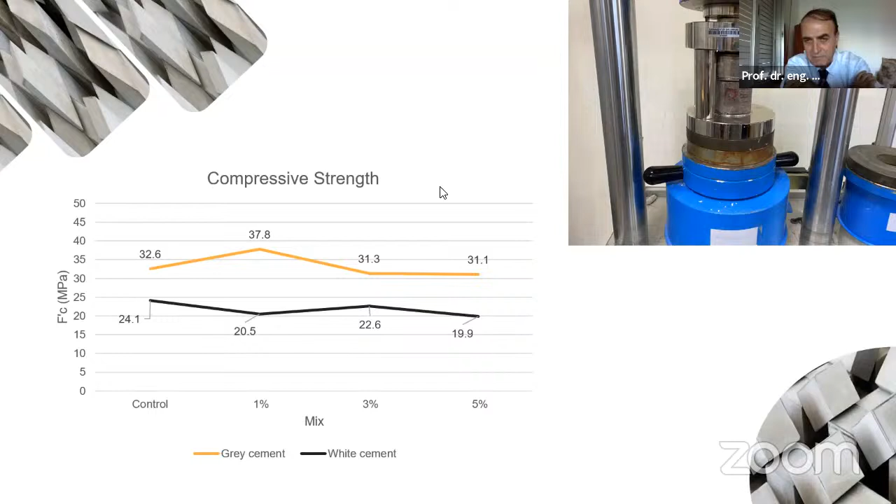Last word. I would like to highlight that this work, as in its first part, won the award.

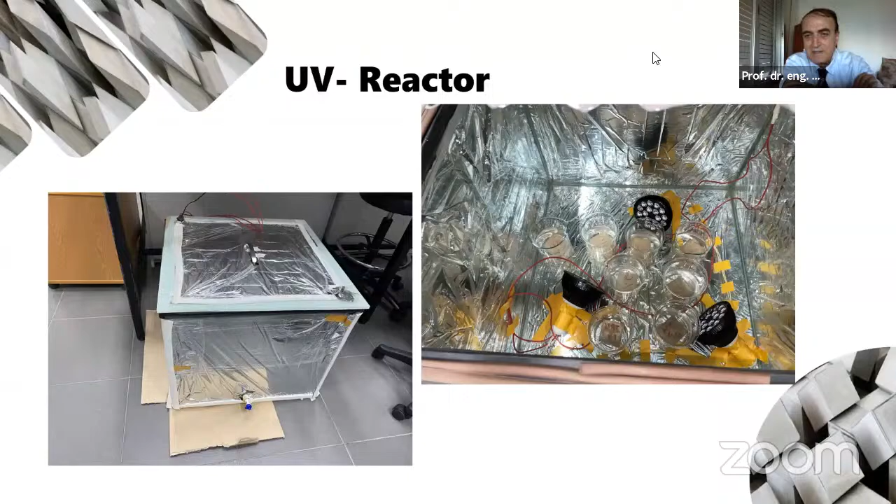Thank you, Dr. Yasmin, thank you everyone. Maybe if the last participant is not available - I don't know if Bashar Al-Shuqair from Iraq is available or not. No, I think this is the last presentation in our conference, if I'm not mistaken.